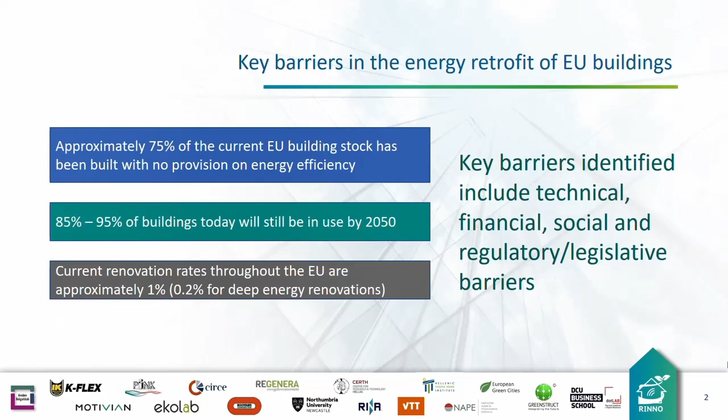A few words about the RINNO project. It's an EU-funded Horizon 2020 project which aims at increasing the renovation rate of EU buildings by delivering a set of innovative processes and products for all stages of a renovation project. These phases are the planning and design phase, the construction phase, and the use phase of the building after the renovation. And these processes and products are supported by a cloud-based platform, as well as novel funding mechanisms.

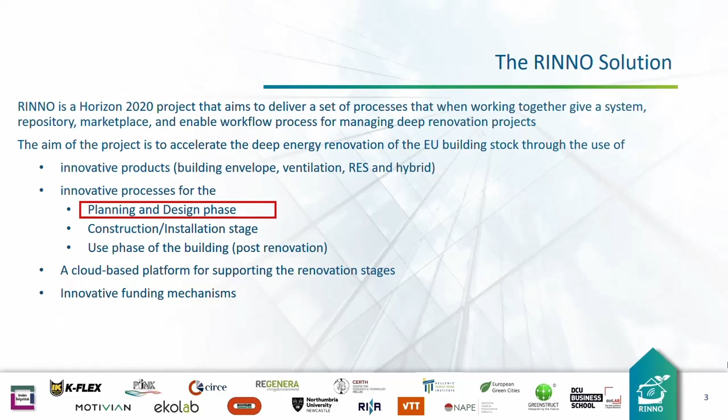In the work that we present here, we focus on the planning and design phase, and the RINNO approach on tackling many of these identified barriers for the design phase. So, what does RINNO consider? It considers a holistic approach for the design stage of buildings, where potential renovation scenarios are simulated and assessed against various performance aspects. So renovation scenarios are assessed in terms of their energy performance, environmental impact and life cycle costing, financial investment performance, as well as user disruption and construction waste.

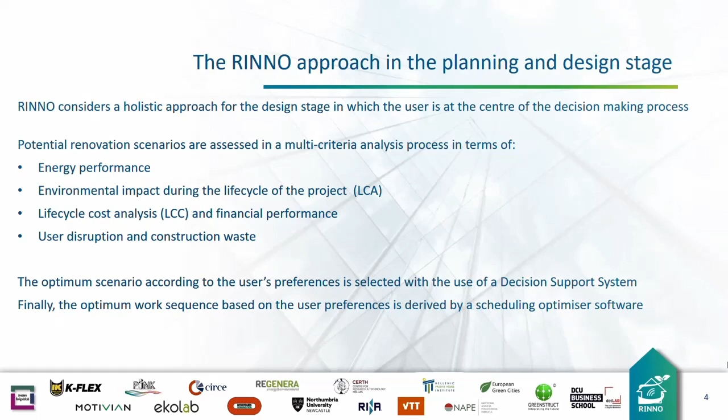After this analysis, the optimum scenario is selected based on the user preferences using a decision support system. And finally, for the selected scenario, the optimum work sequence is generated based again on the user's preferences through a suitable software.

So, in order to do this analysis, several software tools have been developed, starting off with the simulation tools, which conduct the energy, the life cycle assessment, and the user disruption analysis. These are three tools and are all grouped in what we call the RINNO simulation and assessment toolbox.

And the results of this analysis are expressed in suitable KPIs and then are fed to the RINNO Optimizer and Planner, which is another component of the RINNO platform and has two software: the renovation scenario DSS, which based on these KPIs selects the optimum scenario, and then the job scheduling optimizer, which generates the optimized work sequence for that selected scenario. In the next slides, we will go through a brief description of these tools.

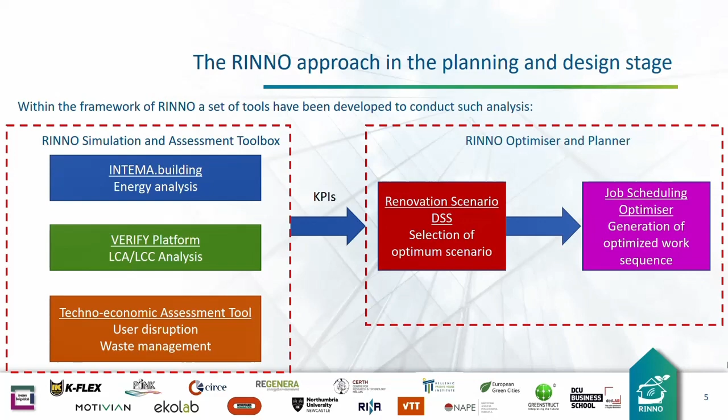Now, starting with the energy analysis, this is conducted with the Intema building tool. Intema building is a specialized software for building energy simulation and was developed using the Modelica language in the Dymola environment. The tool has been validated against the relevant EN standard, as well as similar well-established commercial software, and it is able to model multiple energy production and storage systems in buildings. The tool is user-friendly and allows non-energy experts to conduct energy analysis.

The analysis is conducted through the graphical user interface, where the user enters the required inputs, such as building geometry, material properties, etc. And the appropriate structure of the Modelica model and the relevant libraries are then automatically generated at the back end. Also, the tool is able to retrieve input data from external sources, such as weather data repositories.

When the analysis is finally finished, the heating and cooling loads of the building are determined, and also the energy-related KPIs that are used in the selection of the scenario are calculated. Furthermore, energy time series data are produced, and these are used in the life cycle cost analysis, as we will see in the next slide.

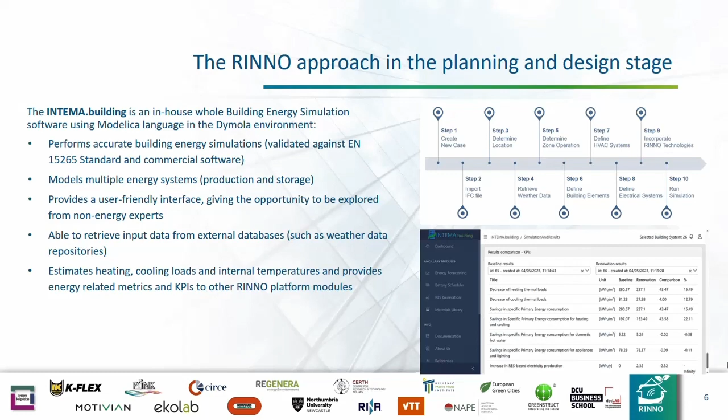The life cycle assessment and the life cycle cost analysis is conducted with Verify platform. Verify is a web-based platform which conducts the LCA and LCC analysis of buildings, following the methodologies of the relevant standards. The analysis is conducted by setting up an electrical, a thermal and investment plan, where the user defines all the electrical systems, the passive and active systems of the building, as well as economic data required for the analysis.

In order to calculate the relevant environmental and cost KPIs, the tool is using its own private database, while it can also connect to external databases and tools. For example, the simulation energy data regarding the use phase of the building for the planned renovation scenario are retrieved by the Intema building tool. Finally, the tool may also connect to monitoring sensors, which are installed in the buildings, and calculate environmental and cost KPIs in near real time.

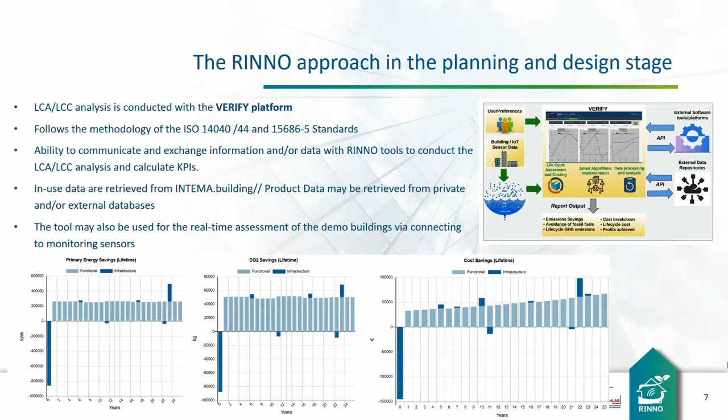Next, the analysis of the levels of user disruption and the expected waste produced during the renovation is conducted with the techno-economic assessment tool. The tool follows a BIM-based approach where the user imports the BIM files and defines the scenario to be assessed. A renovation ontology has been developed, and this maps specific renovation actions to the investigated renovation scenarios. The building elements and the material quantities are then generated by the BIM model, and these are associated with the renovation activities.

The tool then conducts the analysis and estimates the disruption levels and the expected amounts of generated waste, as well as an initial preliminary estimation of the duration of the renovation. With regards to disruption, 4 types of disruption are considered. This is disruption in utilities, in traffic, physical space, which is when the occupants need to leave the building, as well as disruption in internal environment, which is noise, dust, odor, and daylight reduction. When the analysis is finished, a set of indicators are produced, which are then fed to the RINNO optimizer and planner.

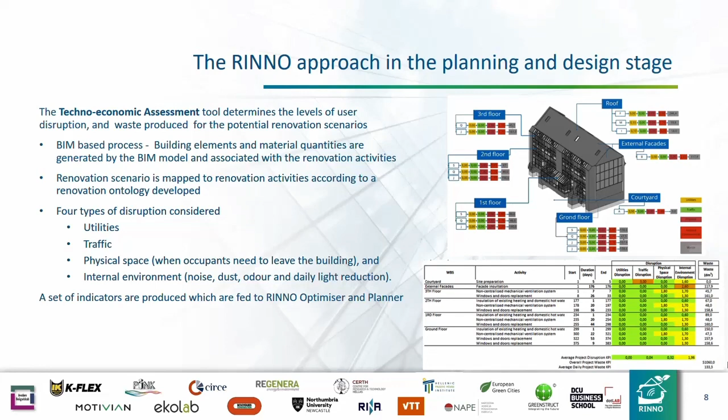The tools presented earlier conduct a multi-criteria assessment of the scenarios and produce a set of KPIs. These KPIs are then used by the renovation scenario DSS tool to select the optimum scenario according to the user preferences. The KPIs that were generated are stored in a database, and the analysis is conducted by a multi-criteria decision-making method. In order to select the optimum scenario, 2 types of input are required. First, the results of the analysis. This is the KPIs that have been stored in the database, and these are retrieved by the DSS. The KPIs are grouped in 4 categories: energy, environmental, cost and financial, and user disruption.

Next, the other type of input which is required is the user input. This is the user preferences, which are entered through the graphical user interface. The user selects the scenarios to be compared and also may choose specific indicators to be used in the selection process. The user may also apply specific weights of importance to each category. With this type of information, the tool then derives the best renovation scenario according to the user's input.

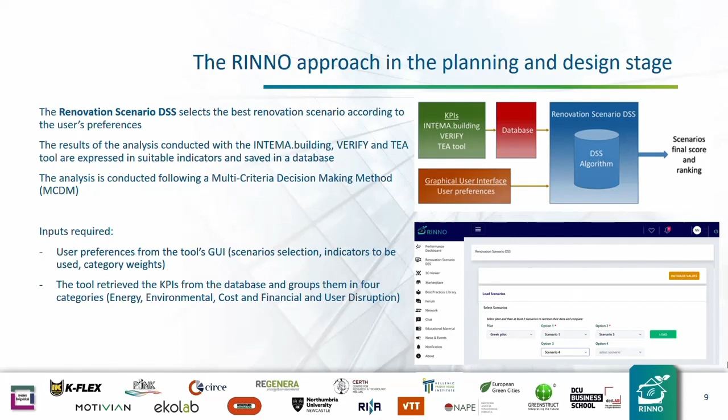Finally, the job scheduling optimizer produces the optimum work plan for the renovation scenario that was selected earlier by the renovation scenario DSS. The optimum work plan is considered the one that minimizes the duration of the project and/or the disruption to the occupants, while also respecting a set of constraints that was set by the renovation manager. The JSO solves this resource-constrained project scheduling problem by applying one of the 4 following methods: integer linear programming, genetic algorithms, priority rules method, or a hybrid method that was developed for the purpose of RINNO.

To do the analysis, specific input is required from the user and from other RINNO tools. More specifically, the job scheduling optimizer receives input regarding job specifications from the techno-economic assessment tool, and such input relates to work duration, persons required, related disruption, and jobs precedence. It also receives input from the user through the graphical user interface, and the input required is the available budget for the renovation, the number of workers, etc.

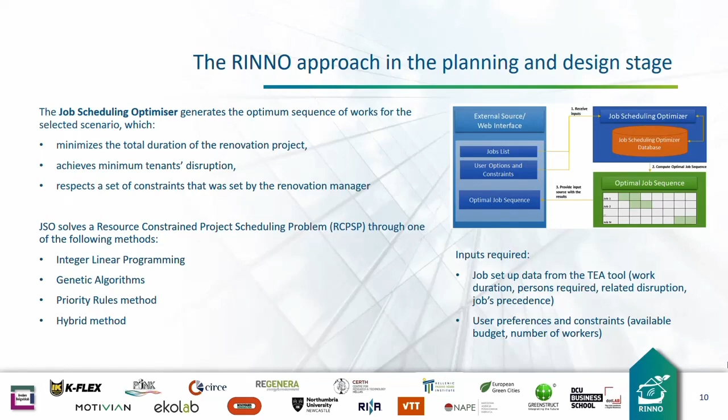Most of the tools that were presented may be used individually to conduct specific types of analysis, but in order for a user to be able to conduct a holistic analysis proposed by RINNO for informed decision making, the assessment and communication of all tools is required in order for the whole process to work in an integrated manner. The tools are exchanging different types of data between them in order for every software to be able to have all the available inputs to conduct the analysis.

Such data are text data, scenario descriptions, the energy time series between INTEMA.building and VERIFY, the KPIs that are used for the selection of the scenario, and the job setup information for the optimum work plan. Most of the applications are web-based, so they are communicating through APIs and exchanging JSON files. In order for the TEA tool, which is a desktop-based application, to communicate with the other tools, this is achieved through an SFTP server where JSON and Excel files are exchanged with the other tools, as shown in the graph here.

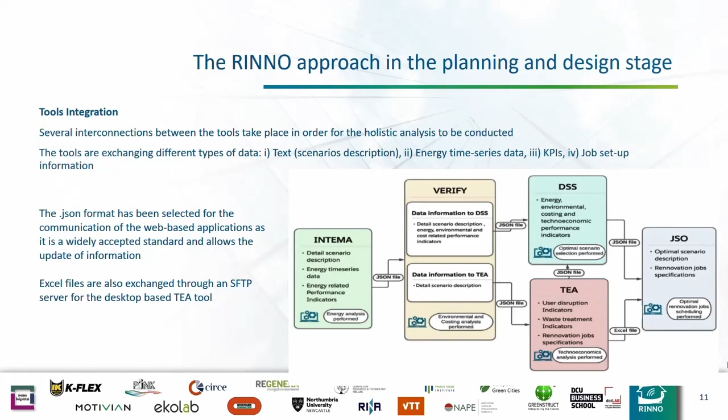In these next slides, we will go through an example of the real-life application of the RINNO approach in one of the demo buildings of the RINNO project, where the innovative processes and technologies are demonstrated. The Greek demo building, which is the example that we see here, is located in the Tavros area of Athens and is a 4-story building constructed in the 1950s. The building envelope is uninsulated and there is no central heating. And the 8 flats that are privately owned have individual heating systems, mostly old inefficient air conditioning units, and a few individual boilers. Within the RINNO project, the Hellenic Passive House Institute will upgrade the building to a nearly zero energy building, which will achieve the Passive House Premium certification.

Within the context of the RINNO project, several potential renovation scenarios were examined, and here we'll see 2 of the scenarios presented, Scenario 1 and Scenario 3. Scenario 1 is a common renovation, which includes some basic measures, and Scenario 3 includes additional measures on top of the ones that are considered in Scenario 1.

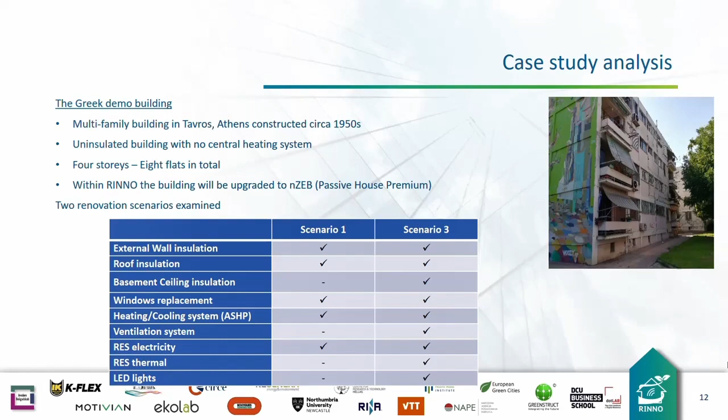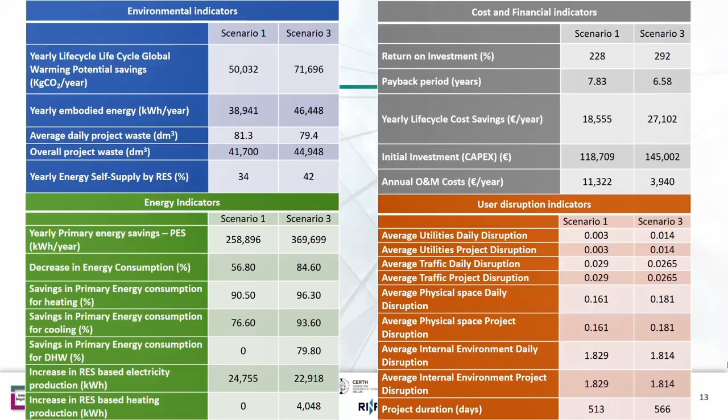The results of the analysis of all the tools regarding the energy, environmental, cost and financial, as well as user disruption categories are presented in this slide. In total, 27 indicators are calculated by the simulation tools, and these are taken into account for the scenario selection process. We can see that based on the analysis of the DSS, Scenario 3 was selected as the optimum one for the renovation. It was found that Scenario 3 performed significantly better in the energy and cost and financial categories, as well as marginally better in the environmental category, while Scenario 1 was only marginally better in the user disruption category.

It should be noted here that Scenario 3 had a higher initial cost than Scenario 1, and it is common practice that renovation projects are often selected based on the capital cost. So if that was the case, Scenario 1 would have been selected instead of Scenario 3. In this case, it's a clear demonstration where the RINNO approach led to the selection of the optimum renovation scenario in the long term.

Furthermore, the JSO generated the work plan considering 2 cases: one where there are 4 available workers for conducting the renovation, and the other where 10 workers conducted the renovation. In the second case, several jobs were parallelized as there was more workforce available to conduct the works, and the renovation time was reduced to 132 days from originally 343 days.

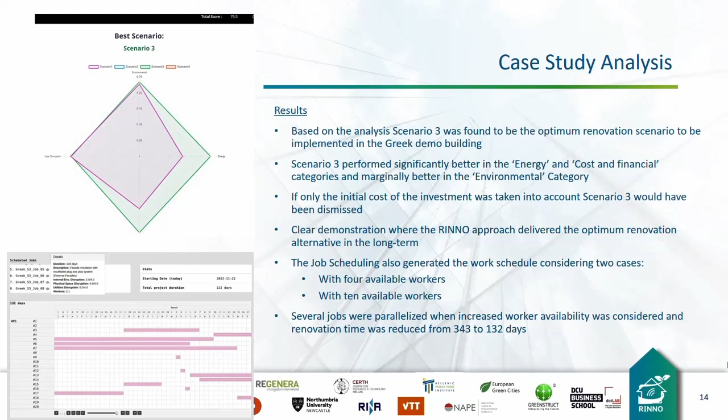The tools that were presented in this work and the integrated process demonstrated through the case study deal with the design and planning stage of the building. However, RINNO includes additional tools and processes for the construction and installation phase of the renovation, so the output of this analysis is then fed to these tools to be used by the construction team on site for improving the construction process.